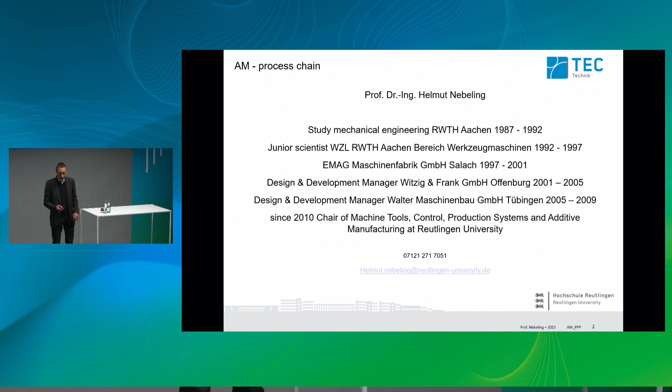I worked for 12 and a half years in the chip removing machine tool builders industry from 1997 to 2009, before I joined Reutlingen University with the chair of machine tools, controls and additive manufacturing. I've been busy with process chains for a very long time now, over 30 years.

And by the way, I'm coming from machine tools, so I know what serious production is. Coming to additive manufacturing, I saw that serious production is not still working up to now. There is something to do.

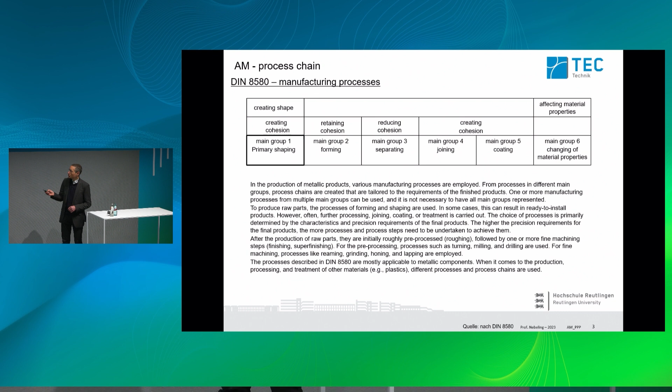We are reading about additive manufacturing as a primary shaping method, and we are going to diversify these methods into primary shaping with liquid slurry, pasty-like, or with granular or powder. But I put it beside because there are some different methods which can be used.

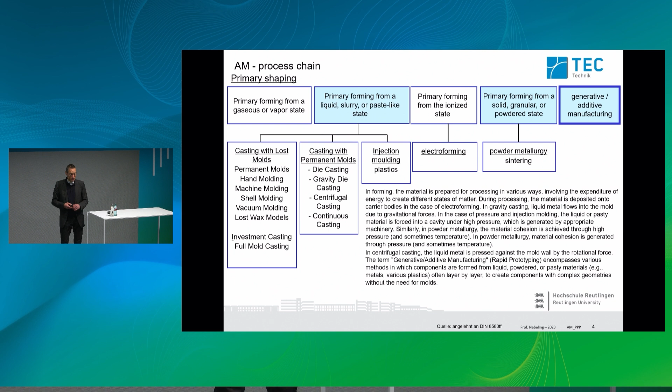In the machine tool area, there are several solutions for how to produce parts like a gear housing or a motor engine block in big numbers of parts - for example, 1 million parts of the motor engine block, or same cycle time for the gearbox.

These solutions grew up over a long time to get a very good process, so that the quality of the parts is given by the rough part, the machining, the assembly, and the finished components and assemblies afterwards. There are combined different technologies like chip removing technology, assembling, washing, honing, leak test, quality assurance. This is state of the art in these parts and this technology.

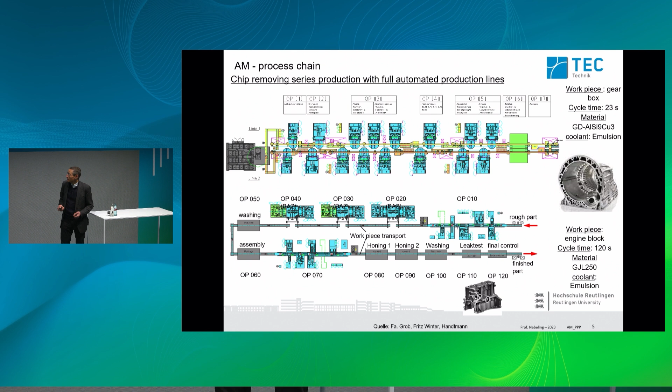This is not given at additive manufacturing up to now. There are some uncertainties which lead to the fact that the processes are often done manually.

Here are the process chains of classical production. We have primary shaping, then forming, particularly depending on the parts, machining, and then afterwards coating, changing material properties, joining, and so on. Additive manufacturing does not substitute the complete process chain.

In the beginning, some years ago, I had the feeling that additive manufacturing substitutes everything. No, that's not the case, because the tolerances which can be yielded by the additive manufacturing process are not good enough that the parts can be used afterwards directly.

So we have to do a reduced extent of machining, and also coating, changing material properties, joining - depending on the material we are producing. This is mostly here for the metallic parts in this process chain, but it's similar for plastic parts.

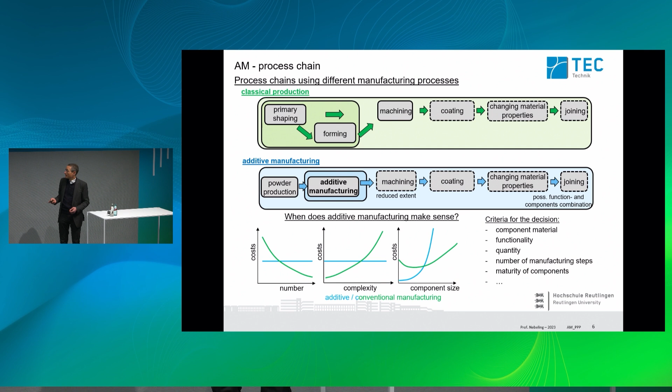Let us take a look at where we are busy. There are several different additive manufacturing technologies. Here at the show we can see all of them, but we are only busy with industrial used plastics production with SLS, selective laser sintering process.

This is a technology we have in our lab, and we can test it together with our employees and do all the technology. We are not working with SLM.

By the way, it would be nice to me to have something, but there we are working together with the suppliers in our region and get some parts if we need them.

Here is the market share of metal additive manufacturing - most of it is SLM, and then some of the others.

So the industrial use parts and plastics are often done by SLS or by stereolithography. It's also increasingly used with FDM, or the HP multi-jet fusion method, which is comparable to SLS in parts quality.

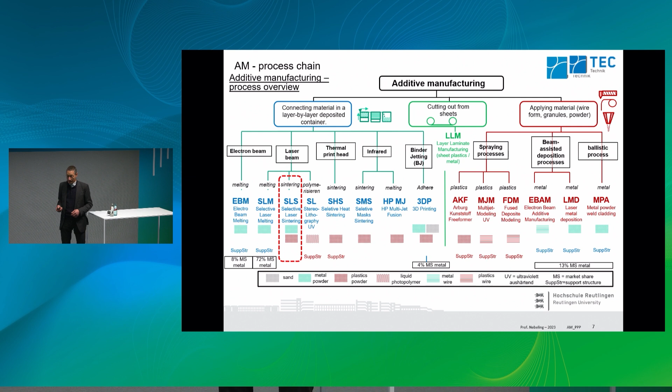But let us take a look at what has to be considered when producing parts. We did a nice project where we developed an additive part which includes a lot of design features that have to be considered when analyzing additive manufacturing parts.

There are combining functionalities, blanks and slots, threads, friction bearings, then bores with different diameters which can be produced. Very small bores can't be produced, or they can be produced, but they can't be cleaned afterwards.

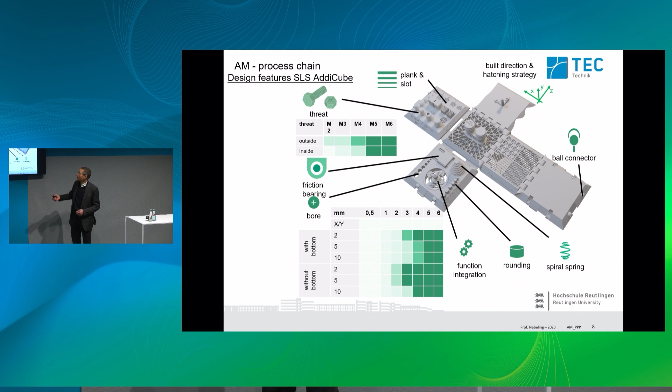This is one of the major fields I would like to present to you. And then there are some structures here, frame structures or honeycomb or something like that. Then ball connectors, joints, and so on.

And these design features we integrate into the part, and also somewhat additionally, fonts, for example, which are printed on the surfaces, some step patterns here with stairs effect, or combined function integration.

Different kinds of edges which are produced. And so we found out that there are some questions that have to be answered.

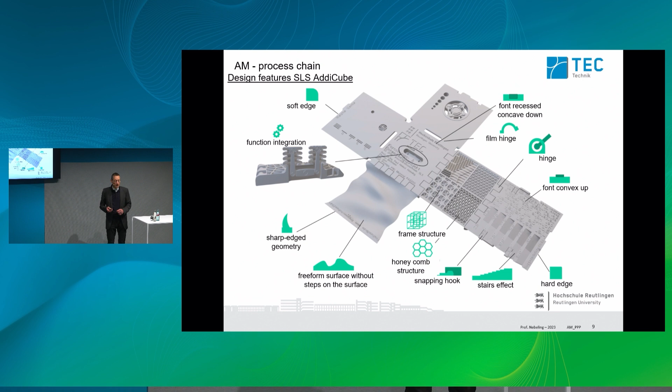We can optimize the production concerning accuracy and quality, concerning costs, or the mechanical properties. It is very difficult to find a production system which optimizes all three factors.

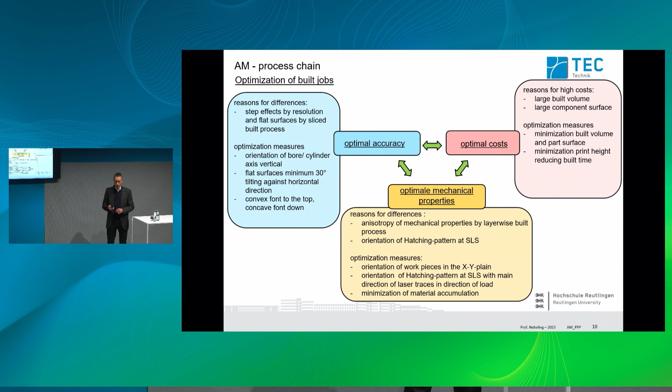After production takes place, we have to take care about the post-processing. Post-processing in the plastics process chain is mostly done manually at this time. There are some drum cleaners I would present afterwards. They can automatically do unpacking and cleaning of the outer geometry, but for complete cleaning and quality assurance, it is not possible to have an automated process chain.

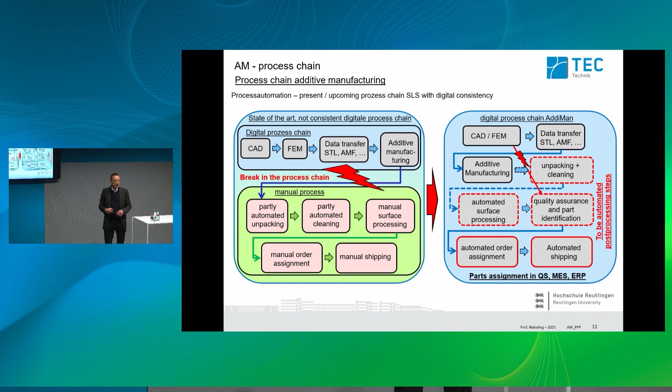And this is one of our goals: we would like to fill the gap between the additive manufacturing process and afterwards the surface finishing, the parts handling, and logistics. And we considered the existing unpacking technologies.

There's the vibration sieve, for example. There is also the rotational drum or tray conveyor—we can see some examples here on the show—and also exhaust or blasting technologies. But how they are equipped with a powder cake, how the parts are handled after they've been cleaned, and how it's made sure that the parts are really cleaned, also internal structures—this would be a very interesting field of application to have a complete automated and very flexible technology.

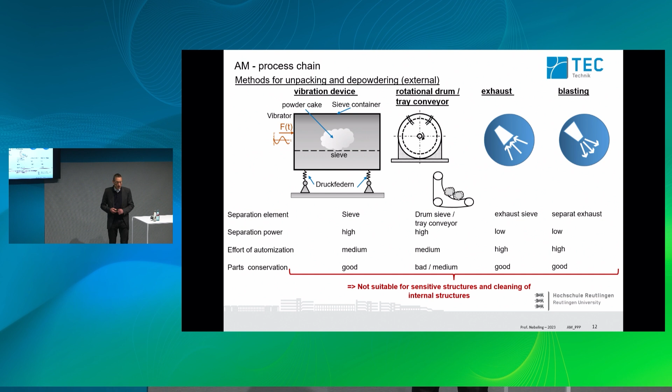Another aspect is how the powder should be used afterwards. State of the art in our machine, from one of the market leaders or big players, you have to use 50% new powder and 50% old, recycled powder.

But if you consider that only a share of 5 to 22% of the build volume is used for the parts, then you put away 28 to 45% of the powder by disposal. And this is very expensive. So there should be a process which leads to the disposal powder share being reduced very much.

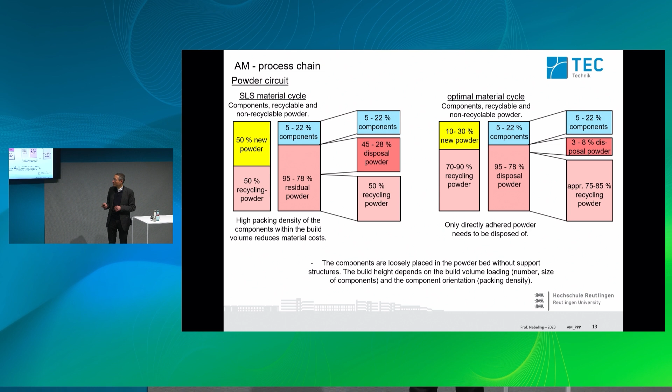This is another field where we would like to give an answer, by using the powder in different qualities. We did some tests already on how to decide which powder can be used and which powder is not usable.

Here are some photographs of parts which are unpacked. They are not cleaned up to now. The powder which is still adhering to the surfaces of these parts can't be used, but the powder which is between the parts can be used again.

We tested it, how to go on cleaning the parts and identifying them.

We are starting from the situation where we have a build job with many different parts integrated, very flexible, like a service supplier producing for different customers. They would like to use the build volume in a very good way, with many parts inside, using the production capacity optimally so that costs are reduced.

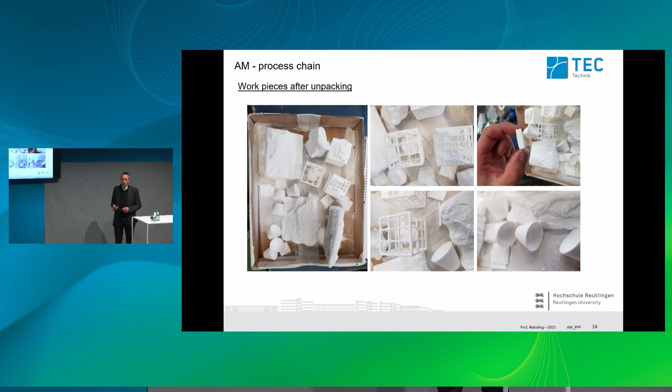And then you have to decide how to clean the parts and which parts can be cleaned, for example, automatically. We considered what has to be done for that. We have the build process where the machine is running for several hours with defined technology—this is not part of our research work.

Then the cooling process, where the build volume is put out of the machine into a cooling device in an exchangeable container. Afterwards comes the unpacking and the fine cleaning—this is a field where something has to be done.

Then we have surface-finished or surface-cleaned parts, but we have to machine or clean them internally—the holes, slots, bores, and things like that have to be cleaned. We developed some nice tools for doing that: automatic hoses, automatic tubes which are put into the holes.

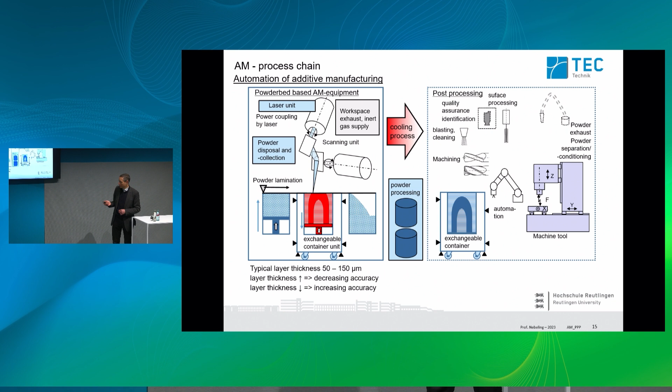And so we cleaned up the parts and found out that the unpacking, depowdering, and also the quality assurance of the parts can be automatic.

Then we have parts produced in one build volume, where different parts have to be combined with the CAD models. They have to be identified to recognize the different features on them which have to be cleaned—the drills or bores have to be found by the automatic robot-based cleaning process.

And then we installed identification for each single part, which compares the part from the camera with the CAD model, and then decides which elements have to be cleaned afterwards.

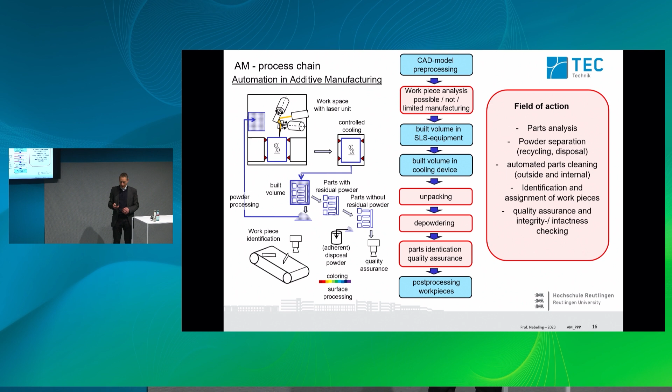And the quality assurance can be done with the same system after the complete cleaning has been done. Then the integrity or intactness checking is done, so that there are no damages.

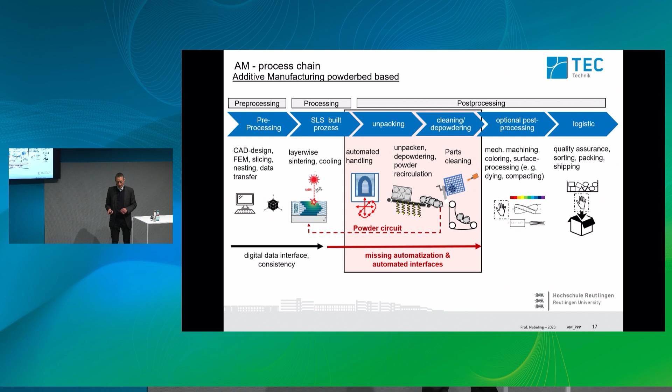We developed a process where the parts are unpacked, depowdered, and completely cleaned with different types of tools, but not manually. This is one of our goals, where we develop the tools ourselves rather than produce them commercially. We tested this in our lab many times with different kinds of parts, different geometries, and different cycle times, and considered which technology can be used.

The drum, for example, and the conveyor belt is good, but only for the outer geometry. Blasting for internal contours is done for open internal structures or geometries, but only in a limited way, because sensitive areas can be damaged by that.

Then we did some ultrasonic basin tests, where we tested several different liquids, but neither the ultrasonic vibration nor the liquids could lead to a clean part and remove the powder from the bores. Another test we did was by vibration, using piezo elements or piston vibrators. This test was also not successful.

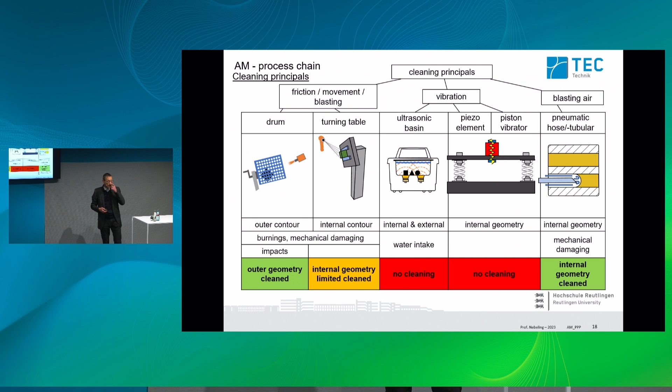But we did some very nice tests on bores from a diameter of 3 millimeters, where we used hoses or tubulars to get into straight, circular, or bent bores and clean them up. We were very successful with this. This technology was developed with the identification of different features, along with an automatic drive of the tools that leads to good geometry and a clean part afterward.

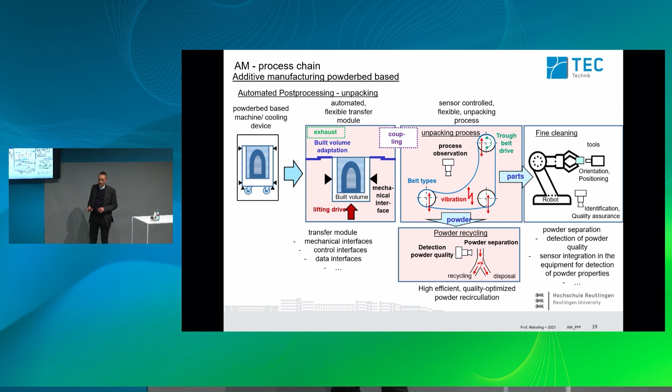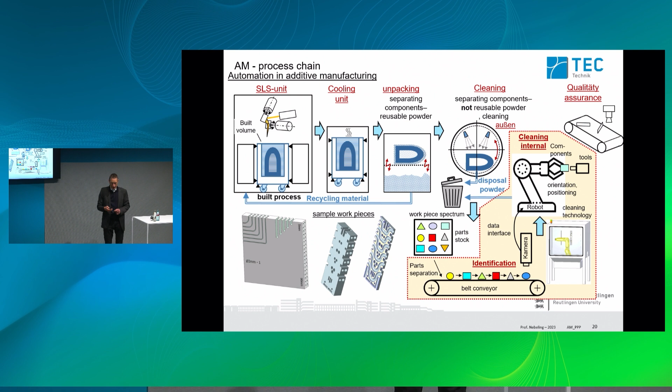The important step in the beginning is to identify the different parts. Here is one build volume with many different parts shown by these signs. They are separated on a conveyor belt, identified, and then the robot takes them and puts them into the tools. Therefore it is necessary to have a system with machine vision. We have a robot and a defined place where the workpieces are located.

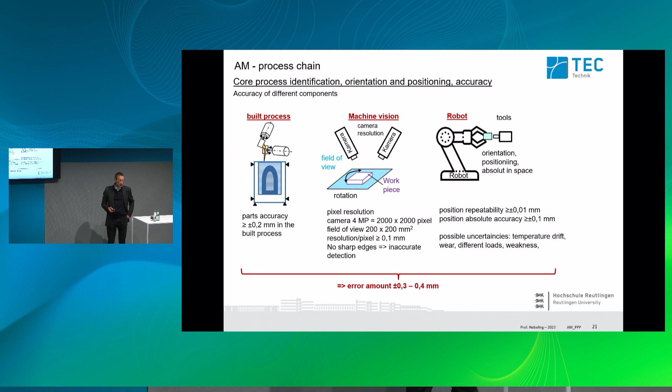A limiting factor is that the accuracy of the vision cameras, the robots, and the build process leads to an error amount of plus or minus 3 to 4 tenths of a millimeter. This sounds like a lot, but it can't be reduced, because the build process, the robot, and the camera resolution don't allow us to make it more accurate. But usually it is enough to identify and clean the parts.

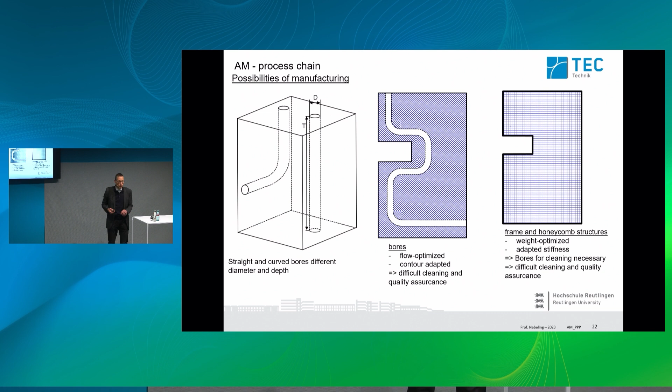In designing some sample parts, we define which features should be produced, for example flow-optimized or contour-adapted bores, and then frame and honeycomb structures to make it lightweight. I presented already some other pictures of it.

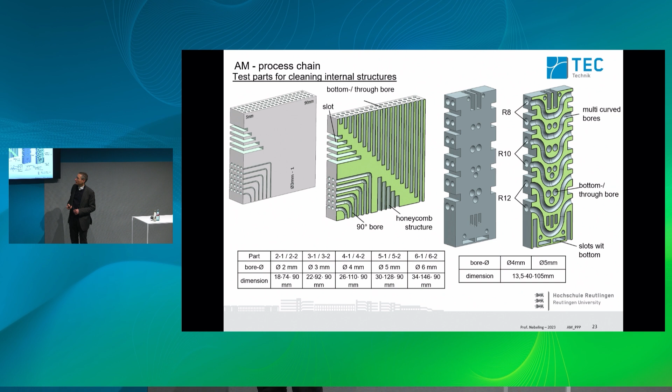We define which sizes and dimensions should be investigated, and we print it on our machine. Then we developed some technology at the end: if the parts are not cleaned on the surface or not completely cleaned, where are the bores located?

We have to locate it, and we have one method using infrared heating, where we use the feature that the powder in the bores does not have the same thermal conductivity as the rest of the solid material. We wait for some time and observe with infrared and camera where the bores are located. This technology is still in development, but it is coming along.

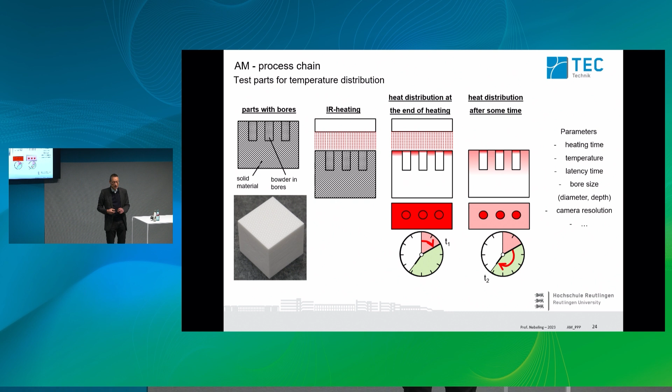We have been working on this for many years now, and we believe that the industrial production of additively manufactured parts has to be increased, developed, and fully automated. This is our goal, which we would like to support through our research work.